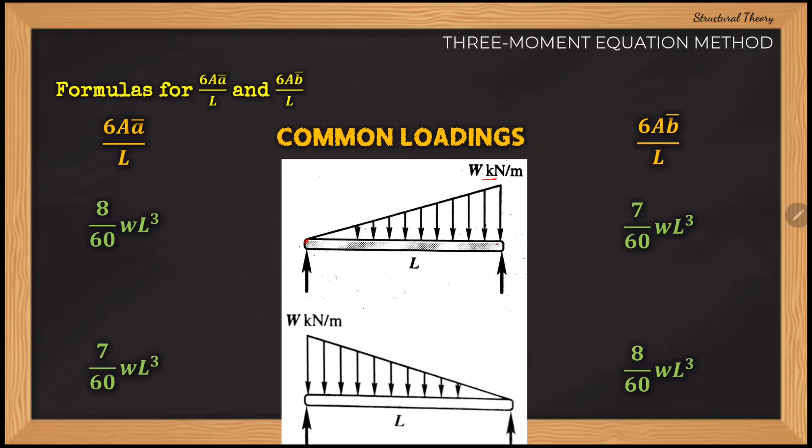So, in other words guys, method 1 here will not be applicable.

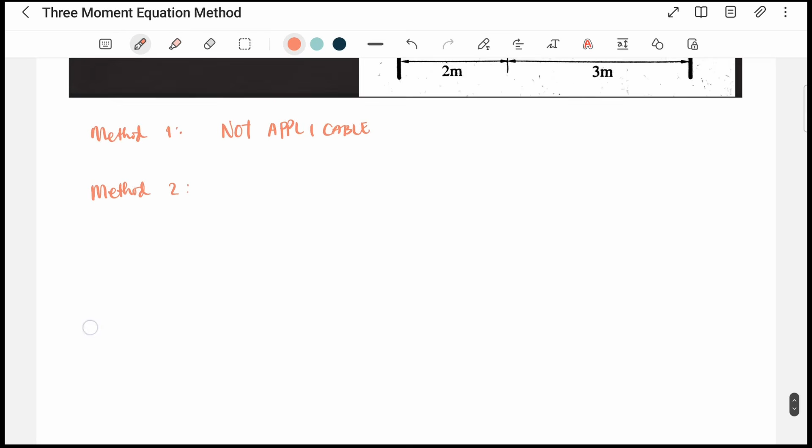Let's have summation of moment about point B equal to 0, clockwise positive, so AY multiplied by 5 minus 1/2 times 600 times 3.

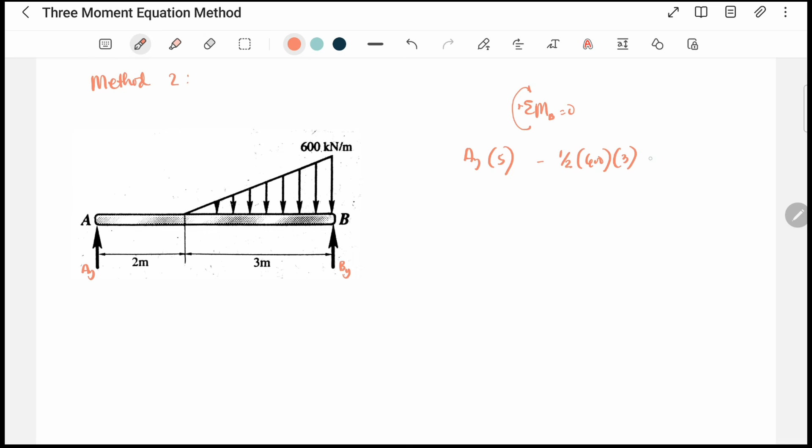Multiplied by 1/3 of 3.

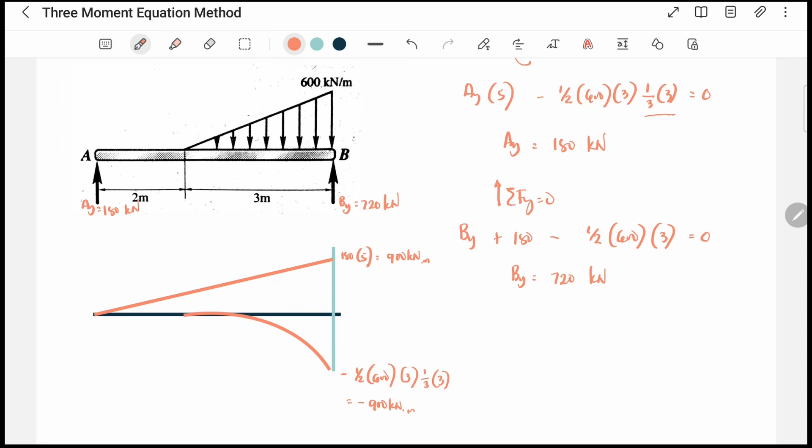So as we did earlier in the previous video, all we have to do is compute the 6AA over L. So since we have two areas here, our formula will become 6 over L summation of A multiplied by A bar.

Magiging ganito: 6 over L multiplied by A1 bar A1 plus A2 bar A2. I-compute muna natin yung ating area 1 at saka yung ating bar A1, tapos yung ating area 2 at saka yung ating bar A2.

So area 1 muna tayo guys. This is just a triangle. So this is 1/2 times 900 times 5, equal to 2,250, and this is in kilonewton square meter.

Kailangan natin guys ng ating bar A1, which is distance ng centroid papuntang left side. Ito yon, ito yung ating bar A1. So ito is equal to 2/3 of 5 meters, 5 meters man yung buo. So this is equal to 10 over 3 meters.

Next, kailangan natin ng A2, that is area ng ating second na moment diagram nasa baba. Take note guys, itong ating load ay first degree, ibig sabihin ito ay magiging third degree sa ating moment diagram. So ang ating area ay magiging 1/4 of negative 900 times 3 meters, bale ito ay magiging equal to negative 675, and this is in kilonewton square meter.

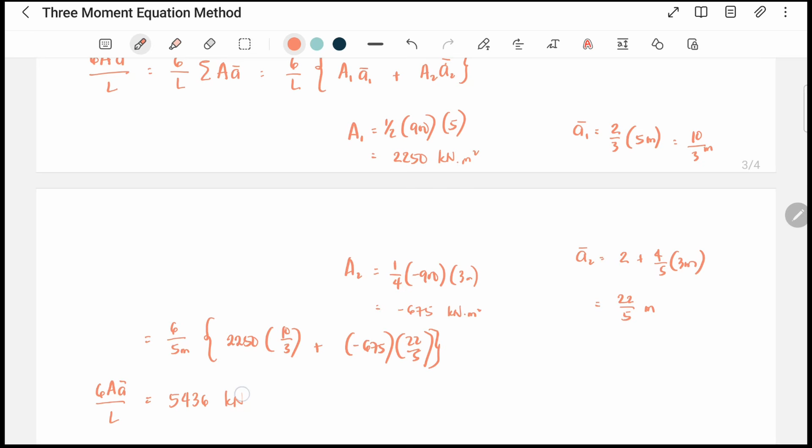Okay, substitute lamang natin yung ating mga values na nakuha. Bali ang mangyayari dito is equal to 6 over 5 meters. Yung ating L natin guys ulit is 5 meters, kasi 2 plus 3 is 5 meters. Then multiplied by A1, A1 natin is 2,250 times 10 over 3, plus A2 is negative 675 times 22 over 5. So ayun, makakuha na natin dito guys yung ating 6AA over L, and this is equal to 5,436, and this is in kilonewton meter square. So yun yung ating value ng 6AA over L.

Okay, so how about yung ating 6AB over L? I-compute natin to. Bali guys, para sa ating 6AB over L, since meron tayong dalawang area, magiging ganito yung ating formula: 6 over L, then summation of A multiplied by bar B, or magiging ganito: 6 over L, then multiplied by A1 bar B1 plus A2 bar B2.

Yung ating area 1 at saka area 2, pareho pa rin kanina since hindi naman nagbago yung ating area. So yung area 1 natin is 2,250, at ang ating area 2 is negative 675, this is in kilonewton meter square. So bar B1 natin at saka bar B2, kailangan natin to.

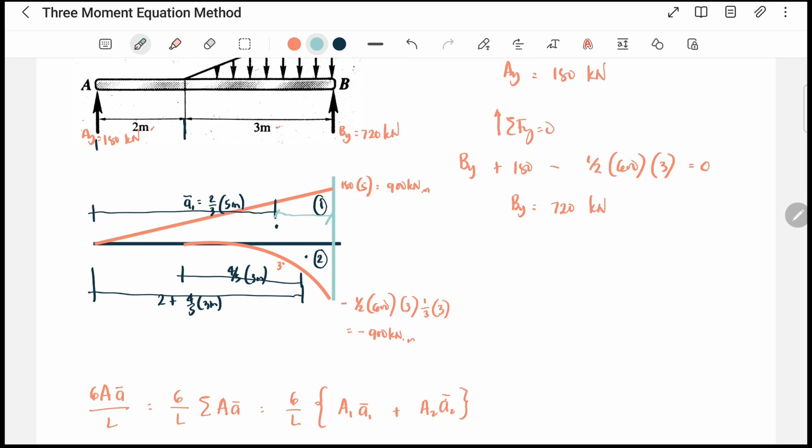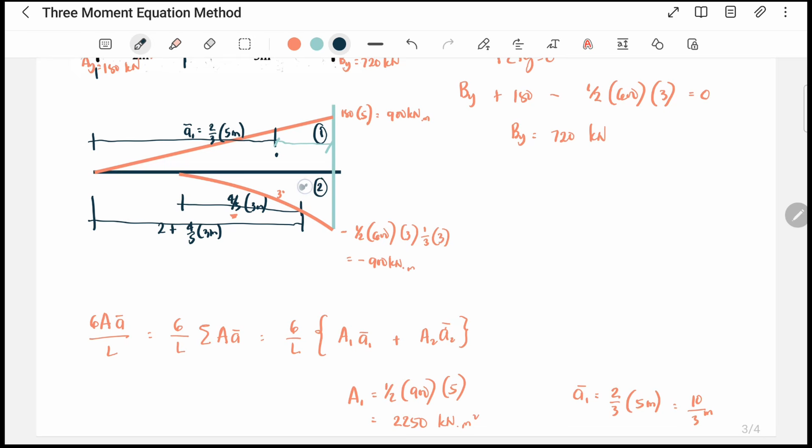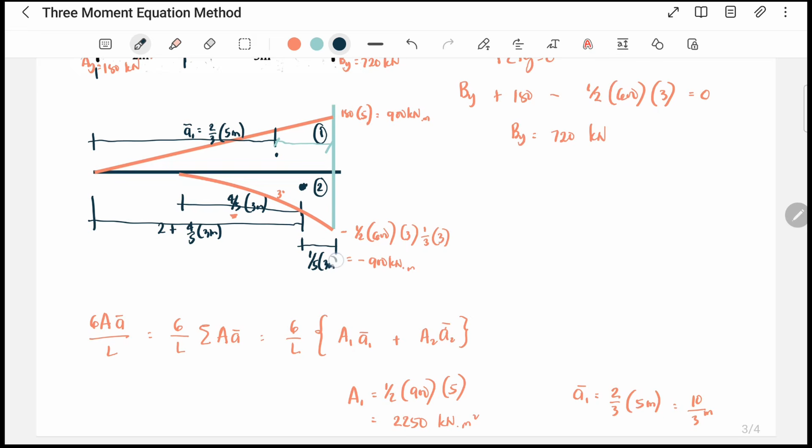Para sa ating bar B1, since ito is triangle, this is 1/3 of 5 meters, or this is equal to 5/3 meters. Okay, so kailangan natin ng bar B2, yung distance nitong centroid na to papunta sa right side. Since we know that this is 4/5 of 3 meters, ibig sabihin ito guys ay 1/5 of 3 meters. So yung ating bar B2 dito is equal to 1/5 of 3 meters, or this is 3/5, and this is in meter.

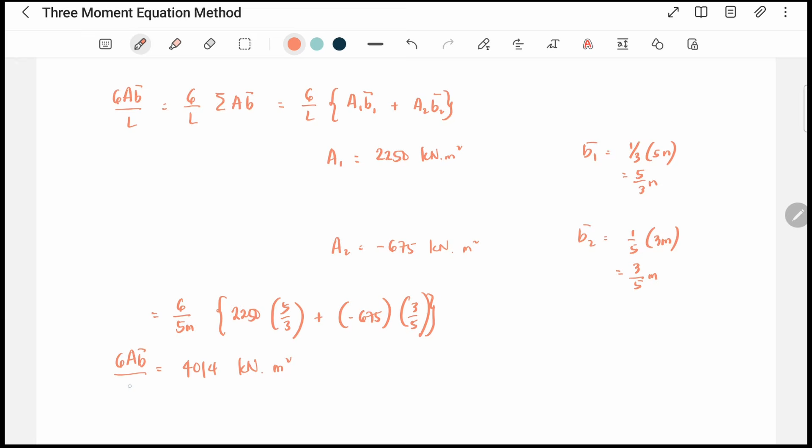Ayun, so substitute lamang natin guys yung ating mga nakuhang values. 6/L, L natin or span length ay 5 meters, multiplied by 2,250 multiplied by 5/3, plus negative 675 para sa A2, multiplied by 3/5. Kapag kinumpute natin ito ay magiging 4,014, and this is in kilonewton meter square. So ito na nga guys yung ating 6AB/L. Ginamit natin guys dito yung ating method number 2, which is the moment diagram by parts.

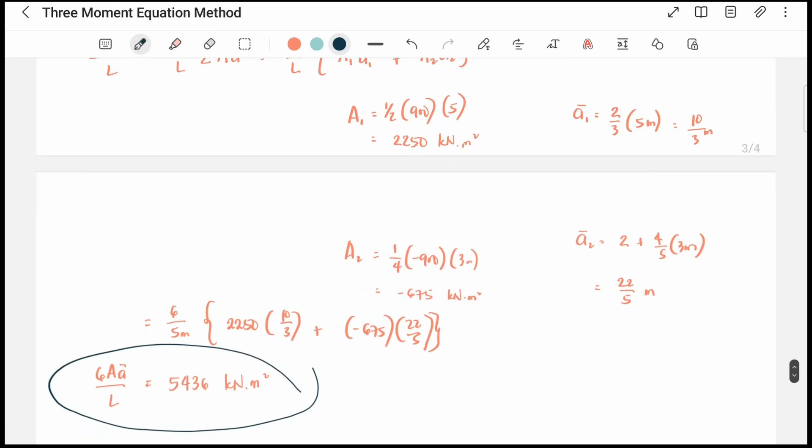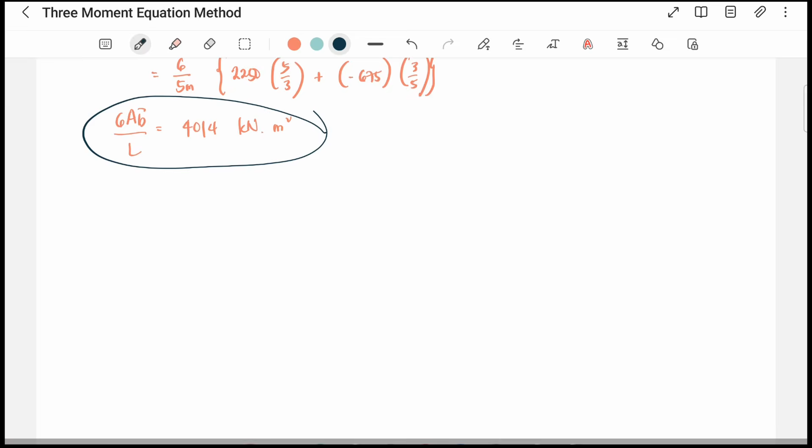Actually, yung method number 2 na moment diagram by parts, sabi ko nga kanina, although mahaba siya, ito ay mabisa na method kasi kaya niyang isolve lahat ng mga kailangan natin na 6Aā/L at saka 6AB/L kahit ano pa yung loading. Pero ituturo ko sa inyo guys yung ating pangatlong method, which is yung technique. Sa technique na ito, maaring mas madali o mas mahirap, depende sa inyo guys. Take note, itong technique na to ay gagamit ng konting calculus lang naman, pero kung yung inyong calculator ay kayang mag-solve ng calculus, then hindi kayo mahihirapan gamitin itong ating technique na ito. Okay, so doon sa next video natin i-discuss yung technique. See you in the next video.